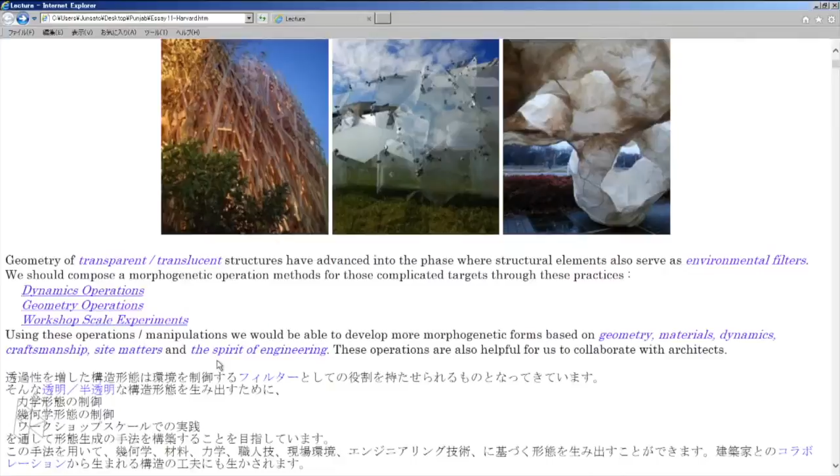We could compose the design method, like an operation story from understanding material to construction. We can have some strategy for those complicated targets. Those practices I'm trying with 3 sessions. One is dynamics operations, 2 is geometry operations, and 3 is workshop scale or experiments. Using these operations or manipulations, we can develop more morphogenetic forms based on geometry or materials or dynamics, craftsmanship, and site matters. Or we can perform the spirit of engineering.

This time, I will show you some projects, how these operations are composed. At first, dynamics operations. I'm researching glass structures. So I have tried several times already actual projects using glass structure. One is this Extreme Nature in the Venice Biennale 2008 with the architect Junya Ishigami. His idea was building greenhouses like this, 4 greenhouses around the Japan Pavilion in the park of Venice.

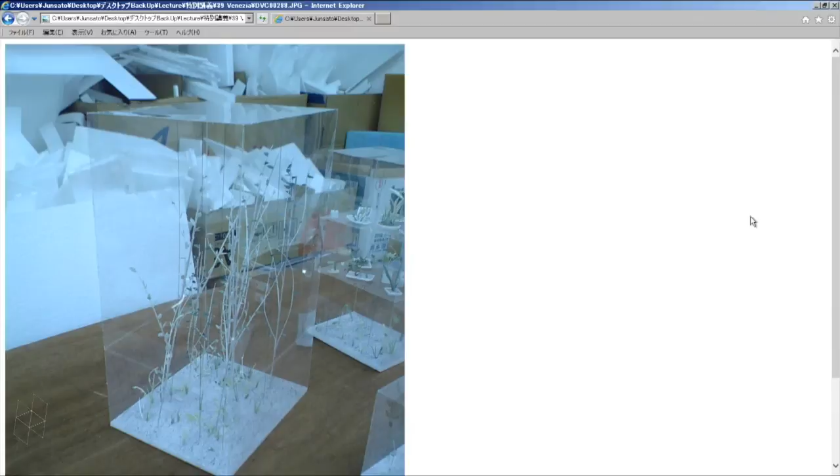And his idea was like this. This is the first model, using this transparent material. He says this should be thin glass, and this is the structure for plants. And his proposal was without using an air conditioner or something controlling humidity or like that.

Without that, only covering with glass, we can make a little different climate from exterior. So a little bit different plants can be grown in this space. And this is a space for plants. So those bothering things, air conditioners or machines like that, or also the structure, should be vanished.

He requests me, and he says, of course, this structure is possible by thick glass. To make the large box by thick glass, it is possible. But he says when the glass becomes thick, it doesn't look transparent. And his request was these columns and beams should be as thin as possible. In this model, you can see this black line. These are columns and beams.

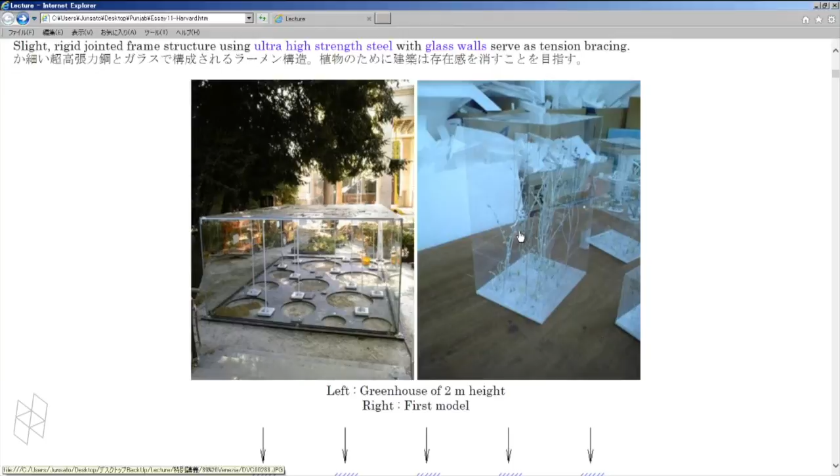His image was like this at first, and he asked me what's the strategy to make this structure feasible. But really, it is easier said than done. I asked him, is that your problem or my problem? I sometimes say to architects or other people, we are the realizer of the structure. So it was so annoying, but I have practiced as many techniques as I have.

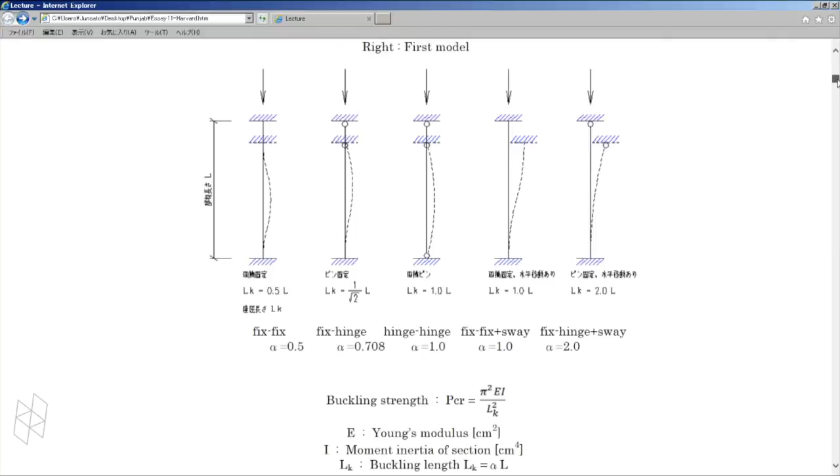And the basic idea is like this. Maybe you know buckling; controlling the buckling phenomenon is important. In the center, this is a simple, basic buckling phenomenon of the thin column, and it has this formula here. For buckling phenomena, the boundary condition is so important. Like this hinge and no sway, we can think this to be a basic one.

And if we could make it fixed and fixed and no sway, it becomes 4 times stronger than this basic one. On the other hand, fixed and hinge and sway, it becomes 4 times weaker. So the target is, of course, this one, fixed and fixed. But we cannot achieve a perfectly fixed one, so we should think how we can make it close to fixed.

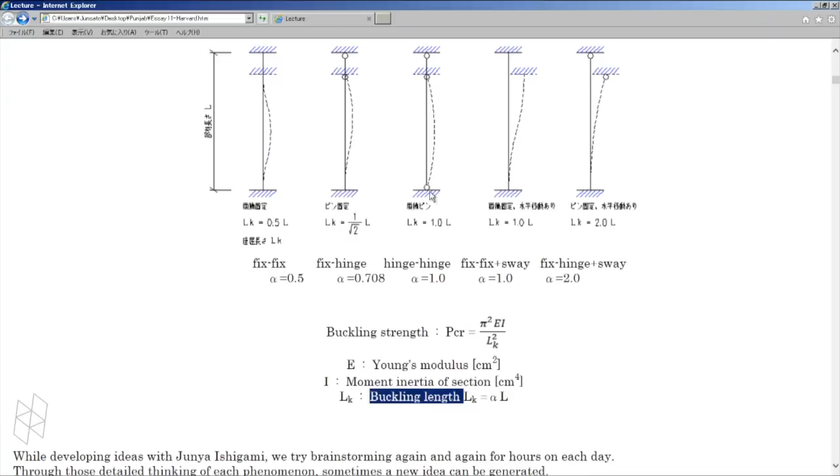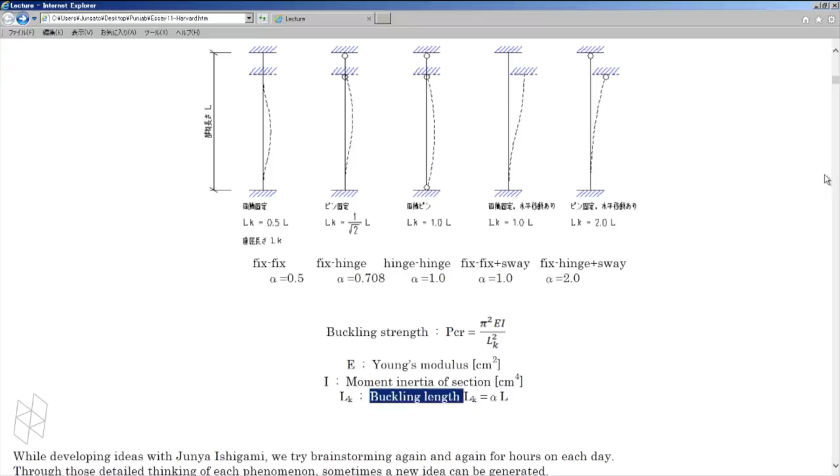And the important thing is, if it is 4 times stronger, as the buckling strength is inversely proportional to the square of length here, the buckling length can be thought of as half of this length. And like that, imagining buckling strength with buckling length is really easy.

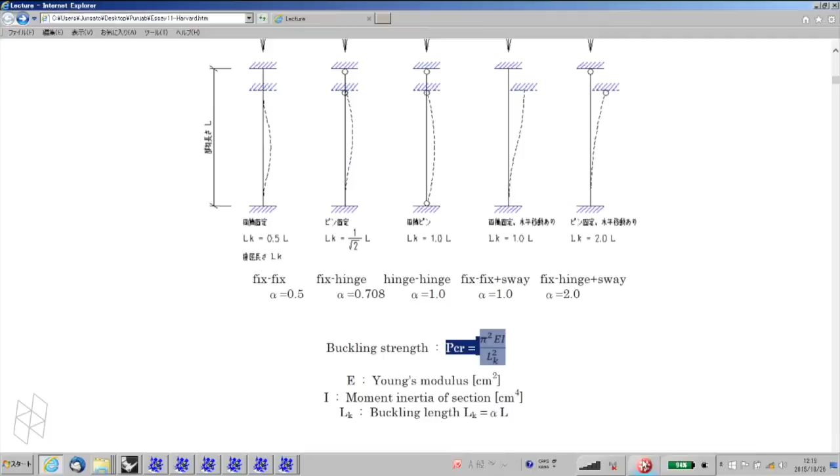With Junya Ishigami, while developing ideas, we tried brainstorming and discussion again and again for hours. Sometimes it was 5 hours each day, meeting to meeting, as long as possible. He can understand dynamics, but he doesn't know this formula. But he knows he should control the boundary condition, and we should control the buckling length. So he asks me how to shorten the buckling length, or about the boundary condition.

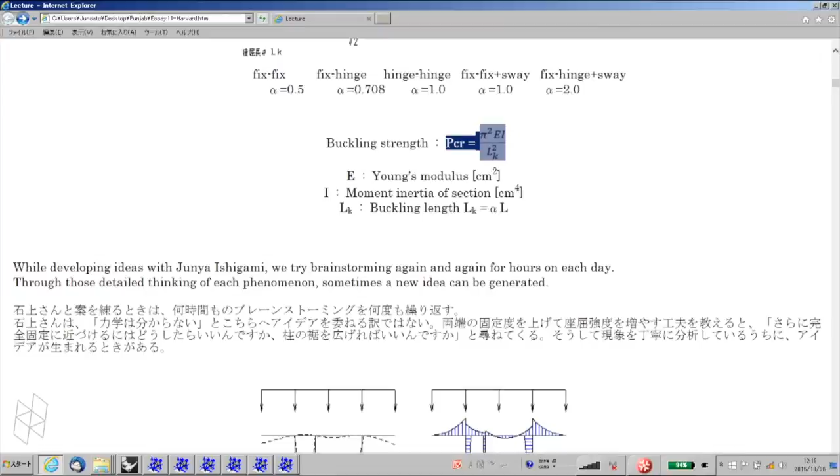How about making the base plate or joint rigid using thick plates, or how about expanding the bottom of the columns? I don't know how to do it, but how about expanding? He proposed to me. And sometimes, he tells me, it is some strange theory of physics. But through that detailed thinking about each phenomenon, sometimes a new idea can be generated. And this time, I got a new idea like this.

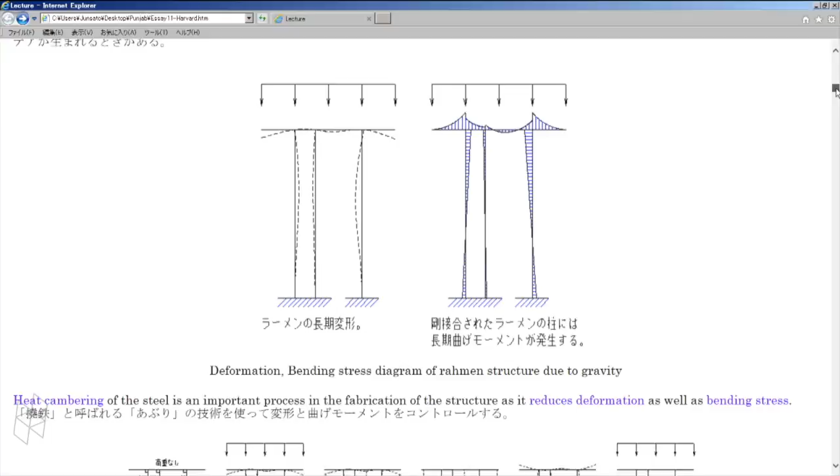Imagine the steel frame like this. With gravity, it deforms like this, and it has bending stress like this. This is the bending stress diagram. Around here it is big, and for the column, a little bending stress is generated. So my idea was reducing this deformation and at the same time reducing this bending stress in the column. The strategy is like this.

At first, the strategy is using heat cambering of steel. Steel craftsmen have really excellent techniques, like heating the steel. I don't know if you know or not: when steel is heated, with a burner or welded, it shrinks. That's the character of steel. And if we could use it effectively, we can do like this. At first, without thinking, build the columns and beams straight.

After that, because the glass plates are so heavy, imagine when the glass is loaded, it will deform like this. To reproduce this deformation, we should realize the same deformation with these weights. These are very heavy weights, and I could realize this deformation. After that, the steel craftsmen make the camber with heat. With a gas burner, they heat the steel and shrink it like this.

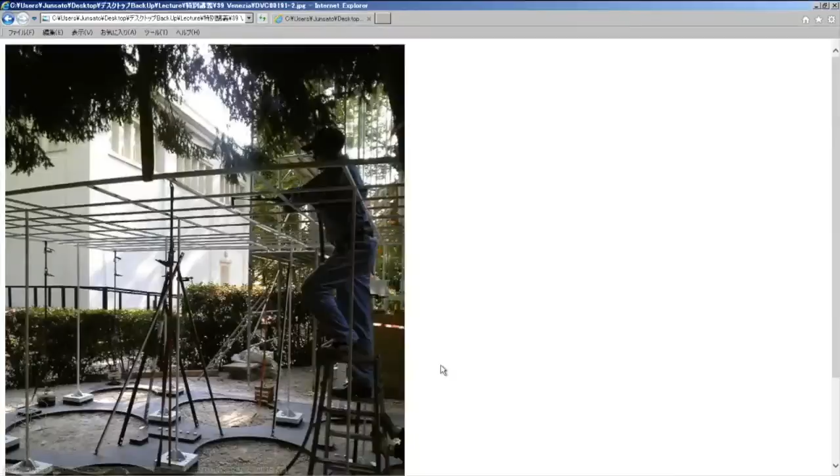This guy is heating here, like dot and dot and dot. He heats, and the beam shrinks and comes up. And finally, if the beams are reformed to flat, these weights should be released. When it is released, the beams come up. But after that, when the glass is loaded, the beam comes down again.

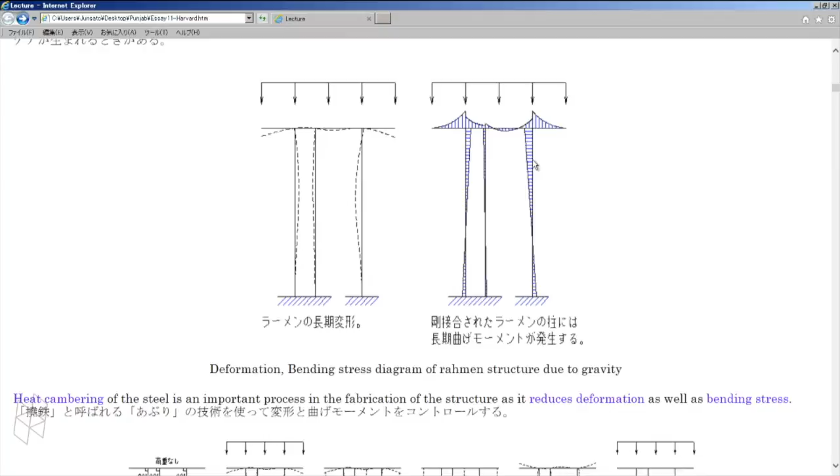They're flat. And in this process, the column is not heated, and so these columns come straight, vertical and straight. That means the column doesn't have curvature, and so the bending moment, bending stress, is not generated. This is a little complicated process, but like this, we could achieve the thin column. We could reduce the bending stress, and we could make the column thinner.

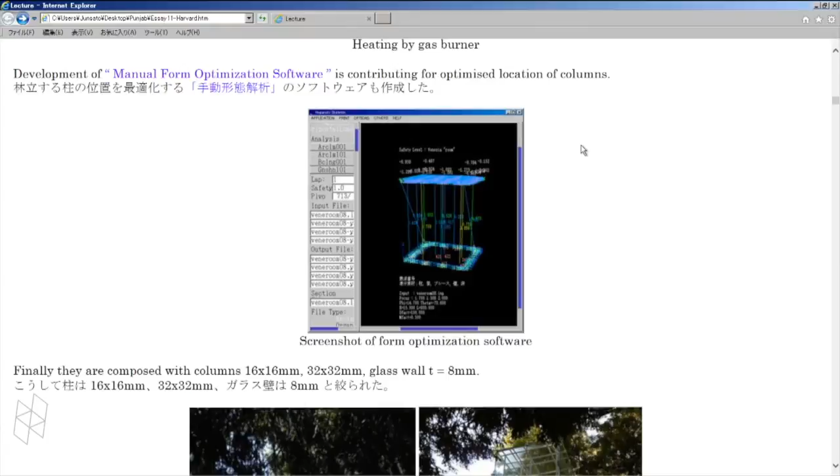And also, I have developed the optimization software for this project. It has randomly located columns, and I have provided the manual form of the optimization software. I will show you later. And using this, I optimized the location of columns to manipulate the distribution of load. And finally, we could make the lower greenhouse. It is 2 meters high with 16 millimeter columns, like this size. And for about 6 meters high, we could make it 32 millimeters, like this size of columns and beams.

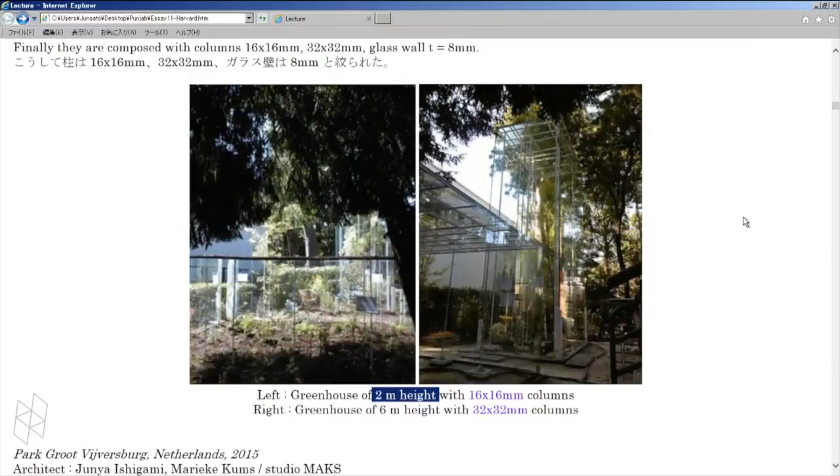And finally, I think we could realize the transparent structure, and like this, plants are located, and maybe Junya Ishigami is satisfied with this. Maybe.

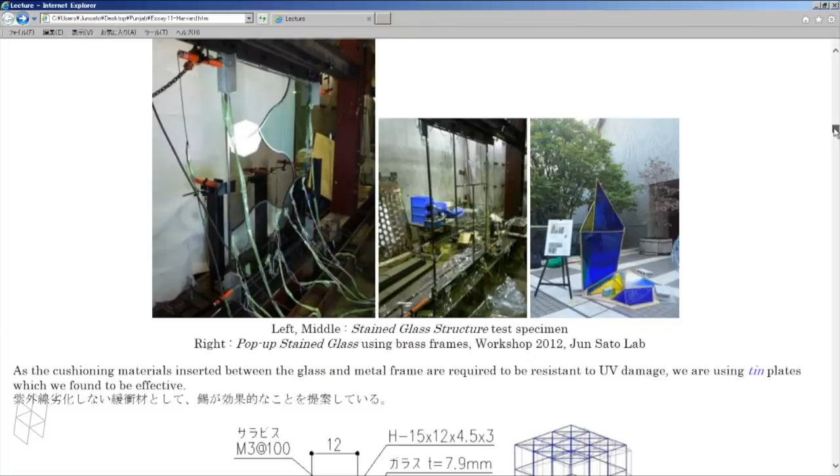And my research about glass structure is like this. One of the things I'm researching now is this. I'm calling it stained glass structure, with this thin frame, and the glass plates are fixed to these frames and work not only as the quake-proof wall but also vertically for gravity. It should work. And because these thin frames are critical for the buckling phenomenon, we should control the buckling phenomenon and the plastic state of the material.

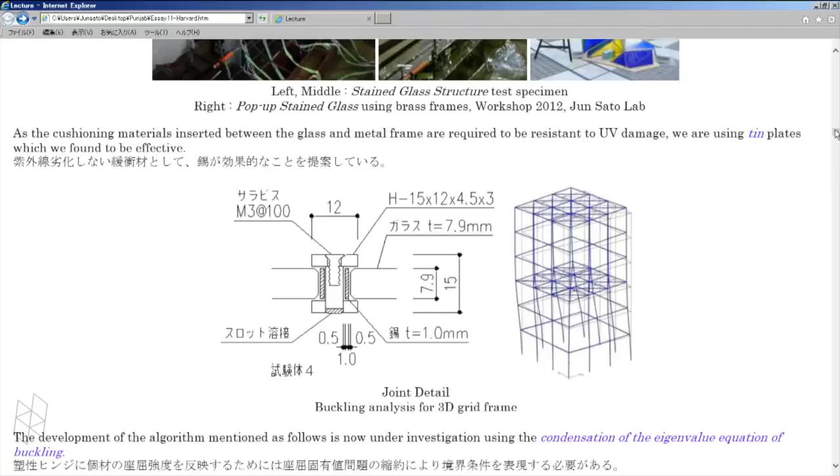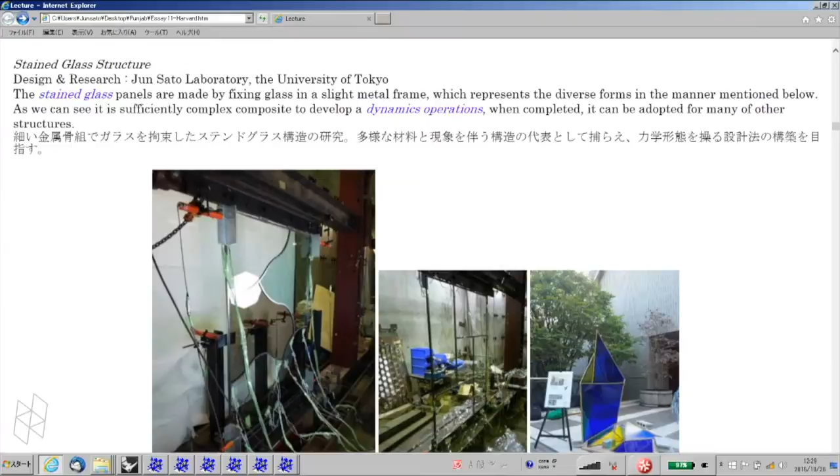And you know, materials have elastic and plastic states. Plastic behavior is sometimes called ductile, the ability to deform. In Japan, we have big earthquakes, so we expect the material to absorb energy in a plastic state, with plastic behavior. And finally, this structure is composed of really diverse elements, and it has diverse phenomena, composed of multiple materials, with bar elements and plate elements, and an optimized framework like this pattern can be optimized to make it stronger.

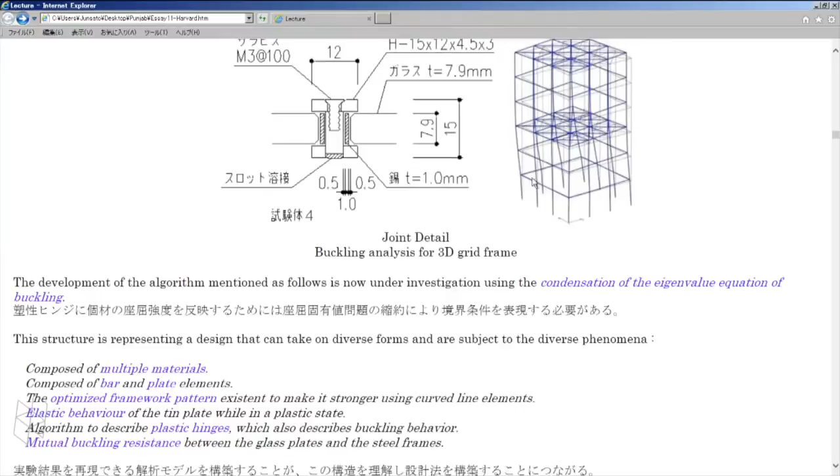And we have here the cushioning material, and I'm proposing that tin, a kind of metal, is useful. The tin works as an elastic material. It is a little complicated, but it works like that. And also the mutual buckling resistance between these frames and glass will work, and we should find that effect. And also the plastic behavior should be considered with buckling behavior.

If the column is thick, buckling behavior is not so critical, so we can focus on the plastic behavior. But when it becomes thin like this, both plastic and buckling behavior interact with each other. So that is important.

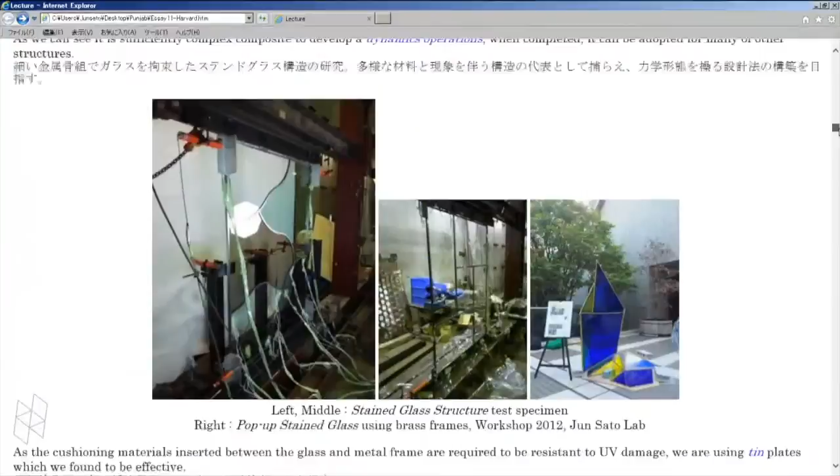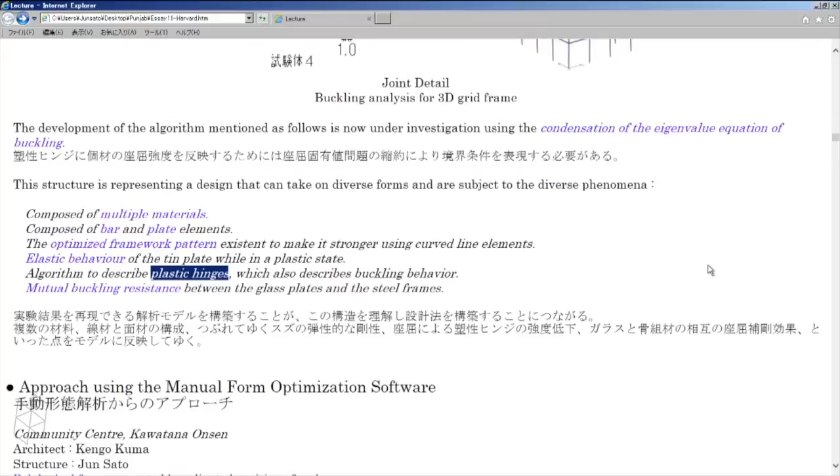With this complex structure with diverse elements, I'm thinking this structure represents other kinds of complex structures. So if we could have a strategy for how to analyze or how to realize these structures, it will be helpful for other structures.

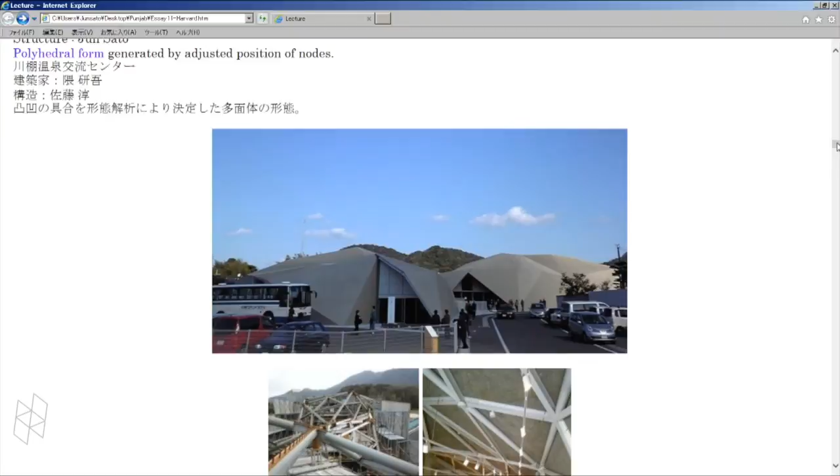And I showed you one of the optimization software, and from here, using the optimization software, which shapes can be realized. This is the community center in Kawatana Onsen in Japan with Kengo Kuma. It has this polyhedral form, generated by adjusting the nodes. I will show you later. It has this shape, and the structure is like this. It has steel frames like this, and it is covered by a concrete surface. For this project, I provided this software. It is like this.

Just a moment. Oh, this is the simple model, for the sample. Once it is calculated, it has red elements like this. This diagram is showing that blue has enough strength, and then comes green, yellow, orange. It still can; the safety ratio is reducing, but orange is still possible. And if we have red lines, red means impossible, or it is too weak.

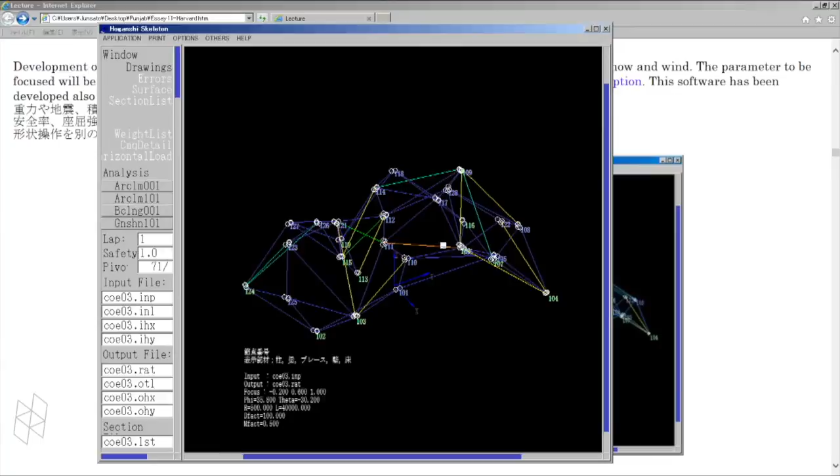And for this software, I programmed it so that using the mouse you can transform the shape like this, and what you have to do is find the shape without red elements. Oh, now red has vanished, and so this shape is possible to build. And around here, there are a lot of blue elements. So maybe this can be inflated like this, but like this, it is impossible, of course. And so, like this, you can find manually which shape is possible and which is impossible. And using this software, it is applicable for many other shapes.

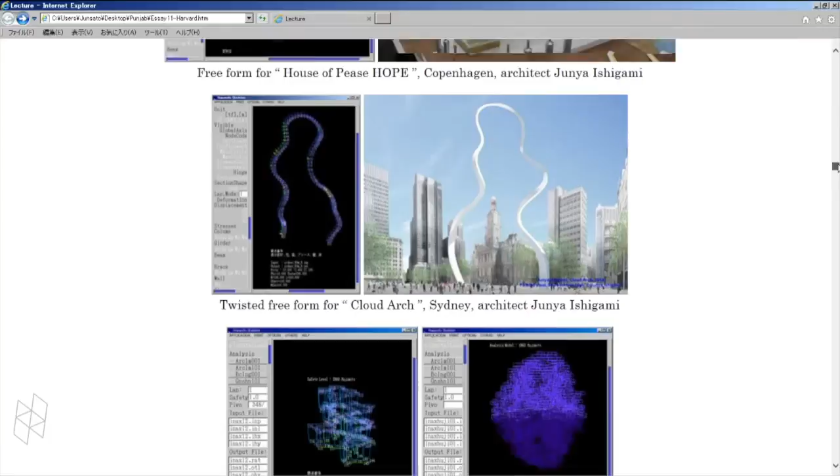Here's a sample for the freeform. This is another project. This is a little secret. Don't tell anybody. This is for the Venice Biennale next year, but I won't tell the details.

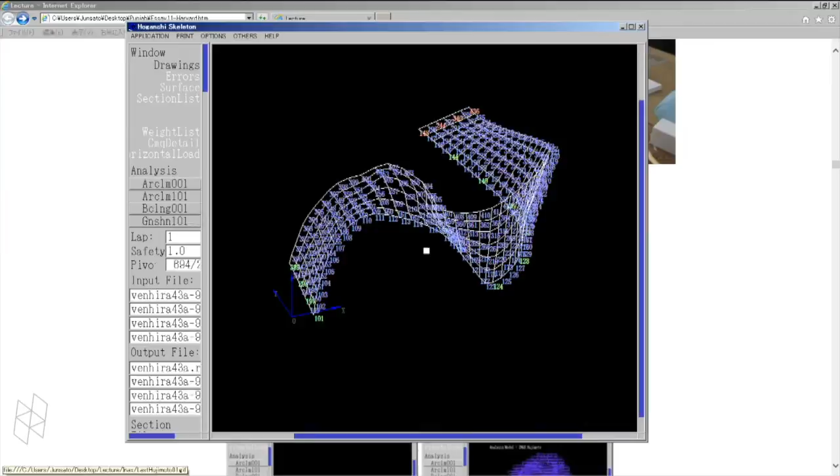All right. This software is performing this calculation here, and you can see the red elements around here. And for this project, I have provided this transforming program. When I pick one point, the area around there will be smoothly transformed, and so you can find which freeform is strong. Using this, it is a little difficult, you can see. Freeform is a little difficult, but you can find it. Maybe it takes time, but you can find it. Oh, around here, the red has vanished, but around here, it is still red. And so, like this, you can find it using this software.

And also I have programmed, not for this project, but this is possible. This is the adding column operation. You can add the columns one by one, like this, and you can find how the columns should be located. It becomes blue. Just a moment. Maybe this will be better.

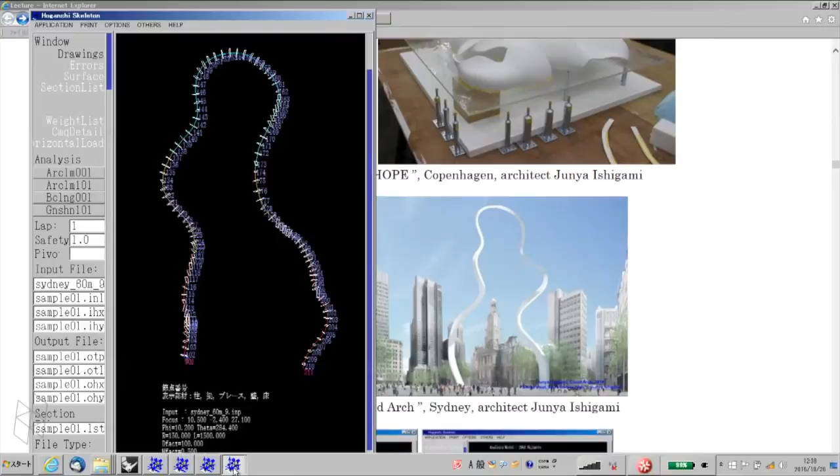For this Cloud Arch project, I have programmed this software. It has this shape, and of course, it is possible to move it like this and smoothly transform the whole shape. And every time, red to blue is displayed like this. I also programmed a close-up around here, and you can see the sections. It has a rectangular section, and looks like a ribbon.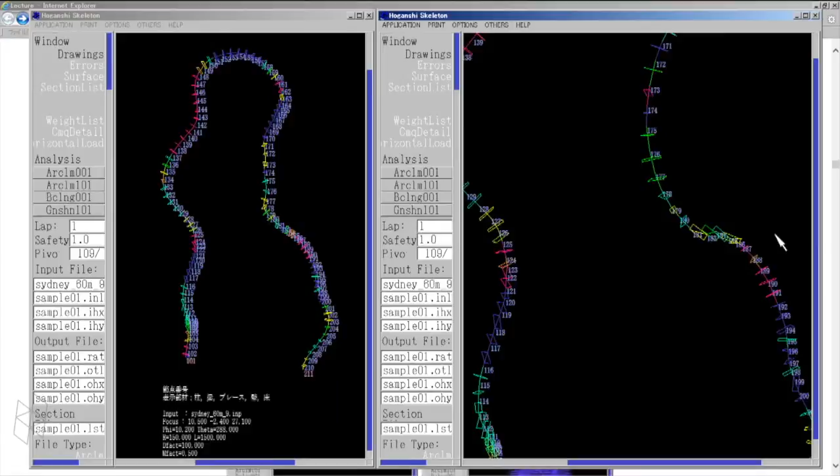And I have programmed it like this. You can see the section is twisted. When I move it like this, every time the color is also changing. Around here it is also twisted smoothly, and finally, we should find how it should be twisted, and the target will be like this image, a twisted and waving tower.

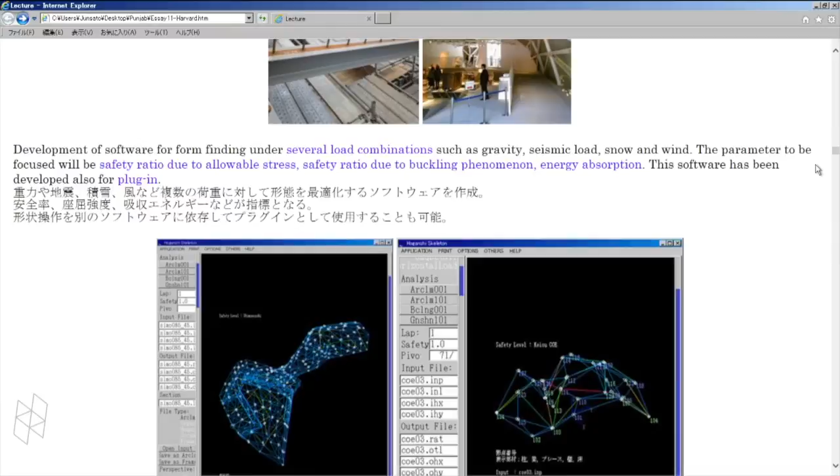The character of my algorithm is that in many cases optimization is performed against gravity, but my algorithm is applicable to several load combinations and load cases at the same time, such as gravity, seismic load, snow or wind, and they can be combined. So after transforming, in just 1 or 2 seconds, the color is displayed. But in those 1 or 2 seconds, many calculations are performed: gravity calculation, X direction earthquake calculation, and Y direction. And finally, the strength checking program for each element is performed, and the colors are displayed. So many calculations are performed in just several seconds.

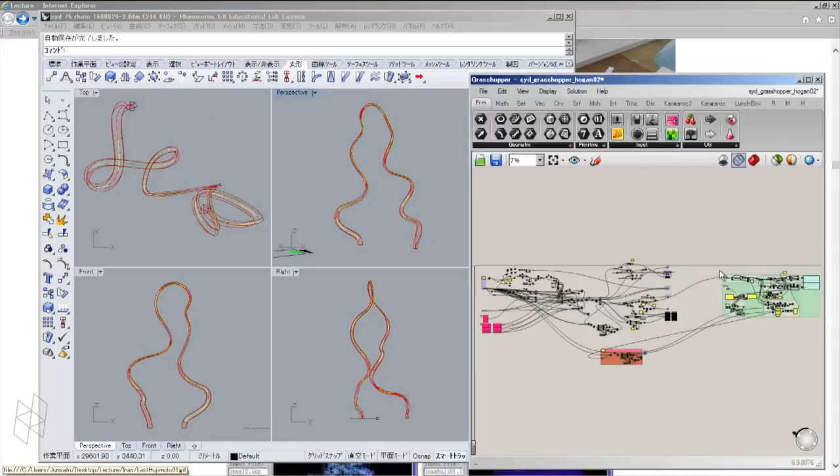And this software is also applicable as plugins. If you're good at transforming in Rhino, you can compose this software. I'm not so good at using Rhino, but my staff has composed these components. Here it has the whole shape, and when you push this button, my software is automatically executed, and the color is indicated like this. This is almost half automatic, and maybe if you want more interactive software, it can be developed into real-time displaying software.

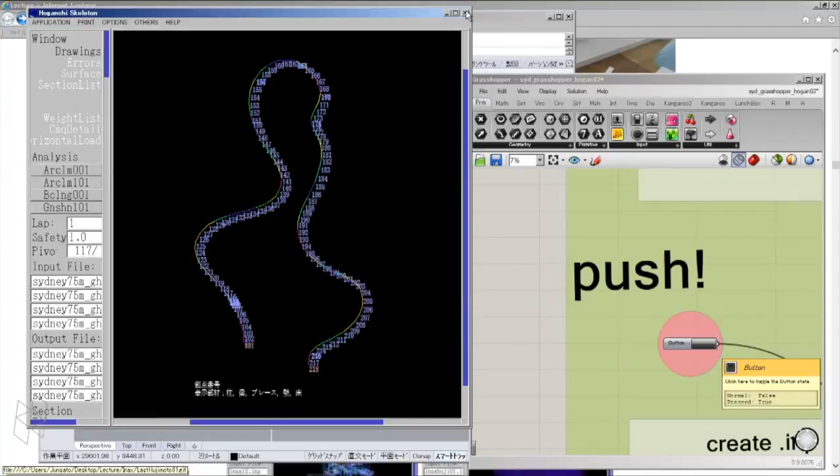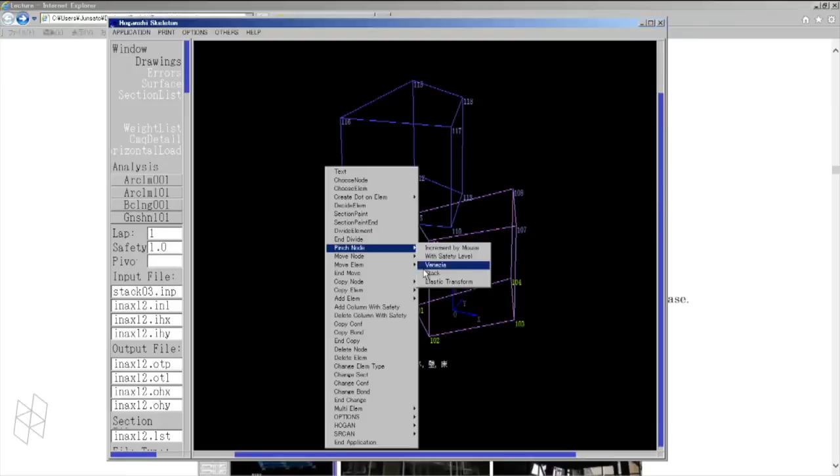And this shape is also adaptable for this stacking system, like this. This software, this algorithm is like this here. When the two volumes are stacked, the calculation is done, and here are the red lines. And if you move one node, this volume will come like this. Oh yeah. And you can see if it is arranged like this, it is easy to build.

But of course, the cantilever is so hard. You can know by this software. For these two elements, it is easy to know without using this software. But it becomes a little hard for my human brain to know if it comes like this.

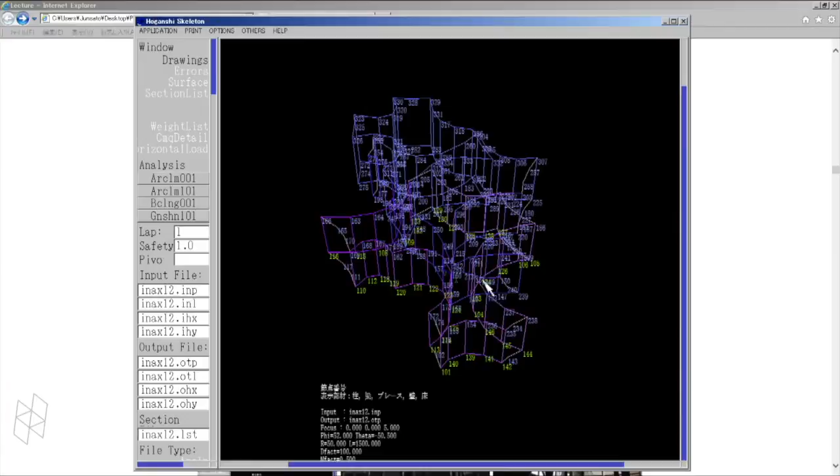This is Sou Fujimoto's proposal of curved walls or free-formed spaces stacked like this. It is a little hard to know how we should operate these frames. When I move one point, it is sliding, but yeah, I'm not sure how now. But this is adaptable for this structure, this shape.

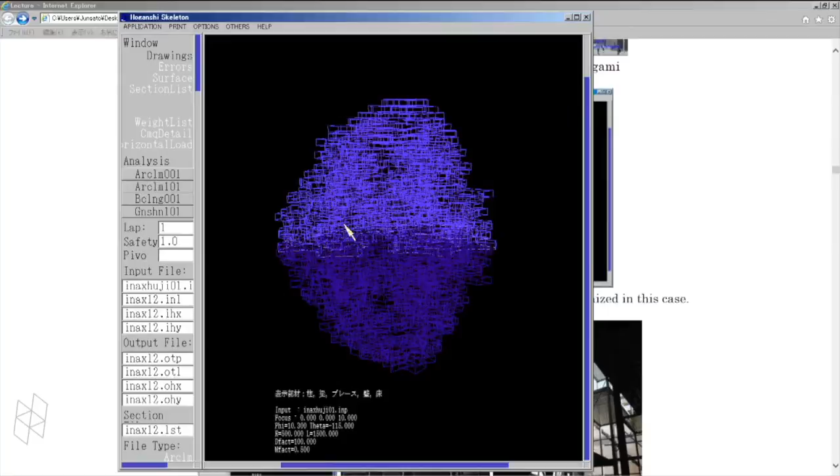And finally, Sou Fujimoto proposed this building. It is 100 meters high, the free-formed volumes are stacked like this, and it has a large porous space in the center. This is not our real project, but his idea was that inside this architecture, we can feel like we are under a big tree and sunlight comes in.

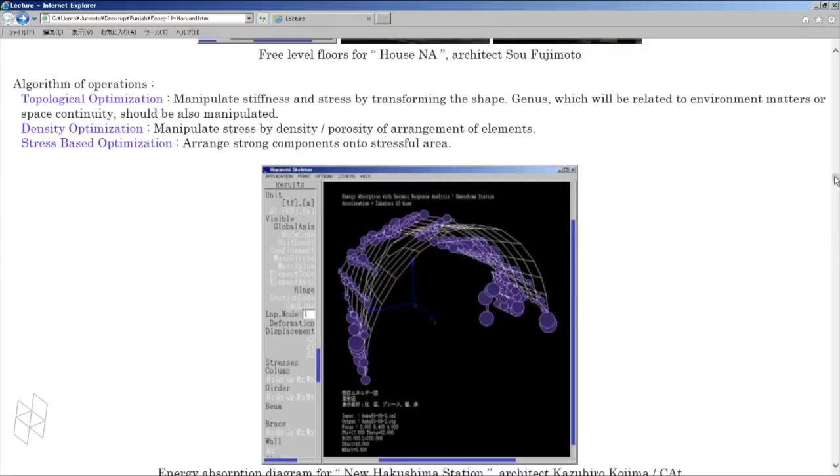And also House NA with Sou Fujimoto. I have tried the optimization like this, with free level floors. The parameter of the optimization, as I showed you, is the safety ratio for stress by gravity or earthquake, and it has a possibility to use energy absorption of seismic vibrations. This is not yet developed, but I'm trying to develop this software.

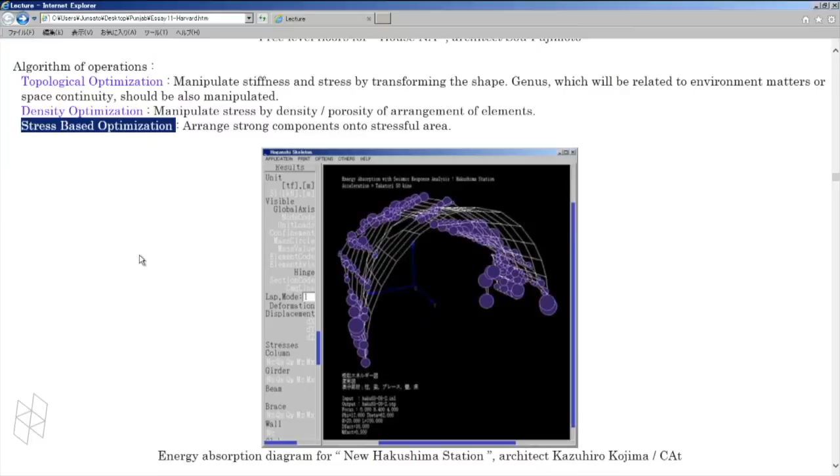What you have to think about is how to transform the shapes to optimize the structure. There are some ideas like topological optimization, density optimization, or stress-based optimization. Stress-based optimization is easy to understand: arrange strong components onto stressful areas. It means arranging strong, thick columns in stressful areas. Density optimization is also easy to know. If you find some area really stressful, you can put many elements there to increase the density.

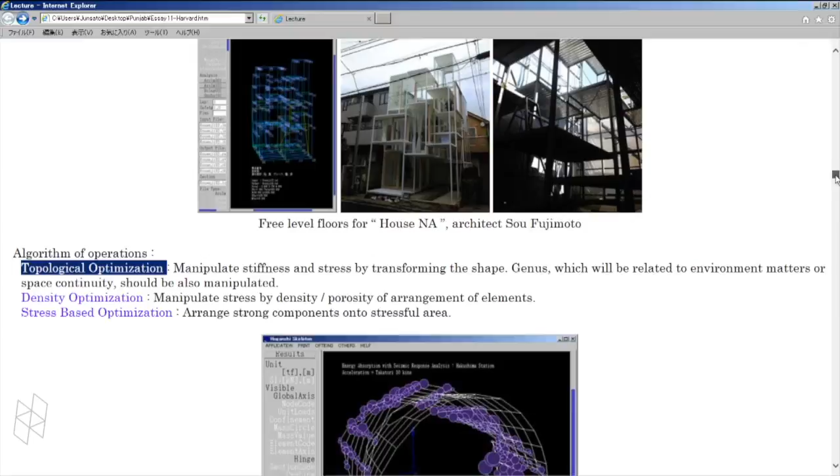And there is topological optimization. I think this word is not so exact in the mathematical meaning, but it is easy to imagine. It means manipulating the stiffness or stress by transforming the shape. The freeform or polyhedral shapes I showed you, or controlling the floors, are maybe topological optimization.

There's a word, genus, in topology. It means the number of holes of the surface or object. This idea is not so related to structure. Rather, it is related to environmental matters or space continuity. So it should be manipulated at the same time with structure and environment.

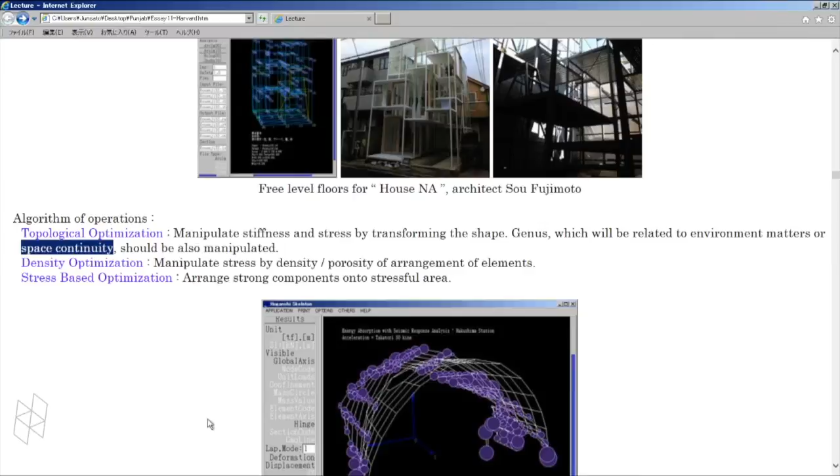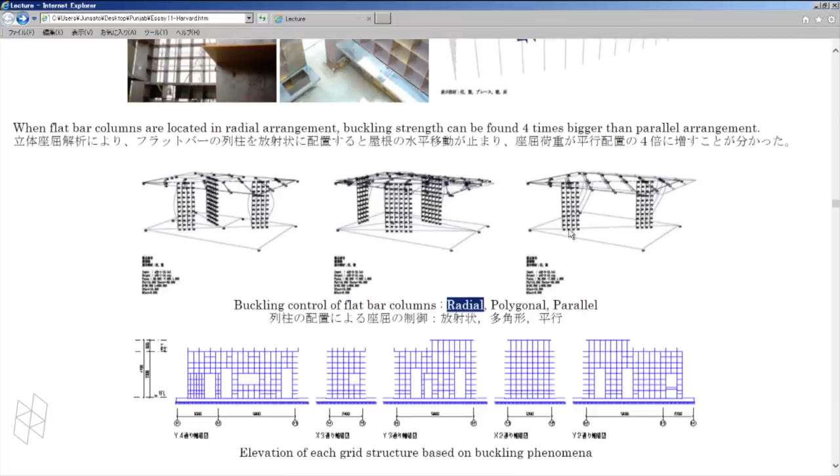And from here, you can see steel fabrication is so important. I'll make it short. I'm trying steel mesh structures, or this one using thin plates. It is only 6 millimeters, without a backboard for the shelves. This structure is possible by controlling the buckling phenomenon. If the thin plates are located in a radial way, it becomes 4 times stronger than a parallel arrangement. And finally, I could achieve this structure with only 6 millimeter steel plates.

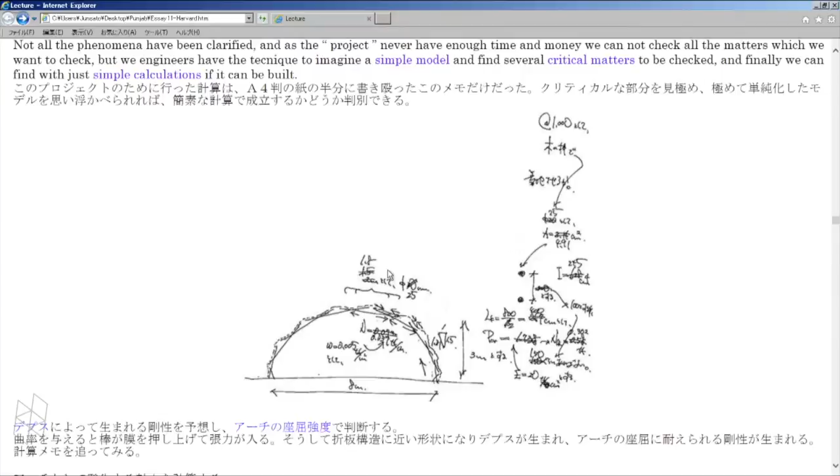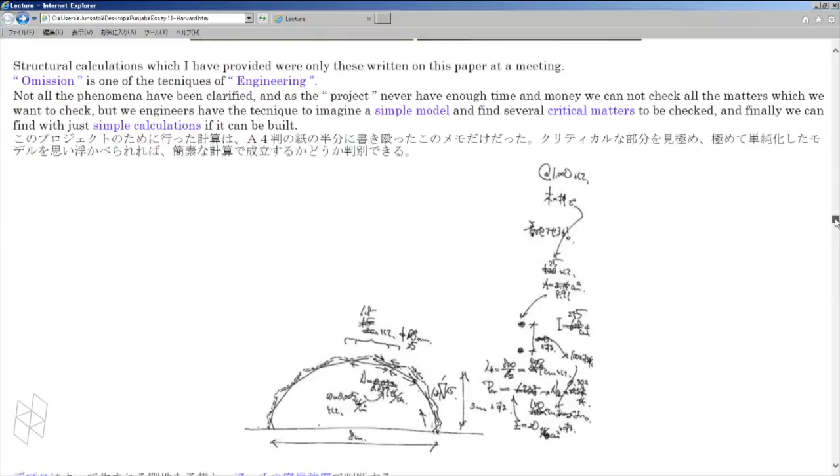And for this structure, what I calculated is only these. I didn't use a computer or software. We have techniques to simplify the structure. I think omission is one of the techniques of engineering. And finally, we can calculate with only these calculations. It is not written in English, I'm sorry, but the detail is like this. With less than 10 calculations, it can be checked whether it is stable or not.

And from here, the geometry operations, what I call all the geometry operations, is like this. This is Sunny Hills in Aoyama in Tokyo with Kengo Kuma.

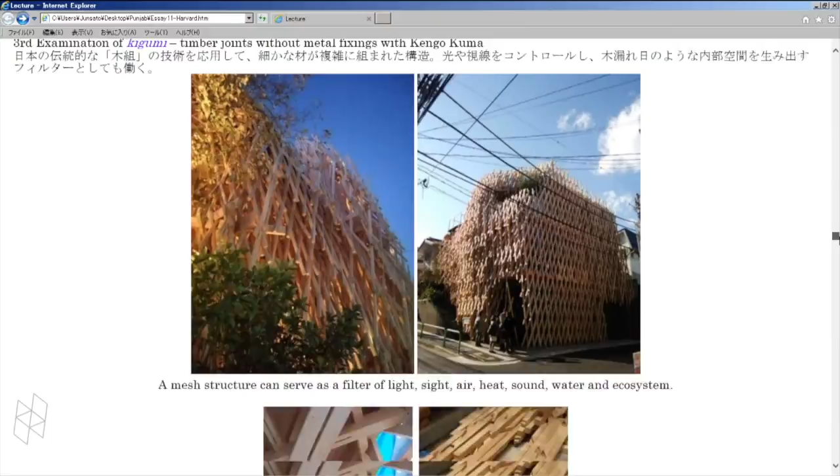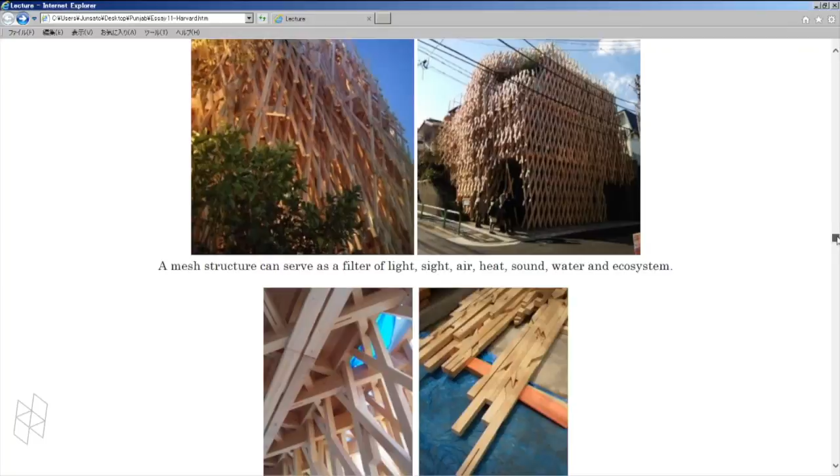I have tried the 3-dimensional or complicated Kigumi structure. Kigumi is a Japanese word, a traditional timber joint system. I have developed from that traditional system this really complicated shape. But I thought this looks very much like a filter for something like light, sight, air, heat, sound, or maybe for an ecosystem. So with this meshed structure, we can control that environment.

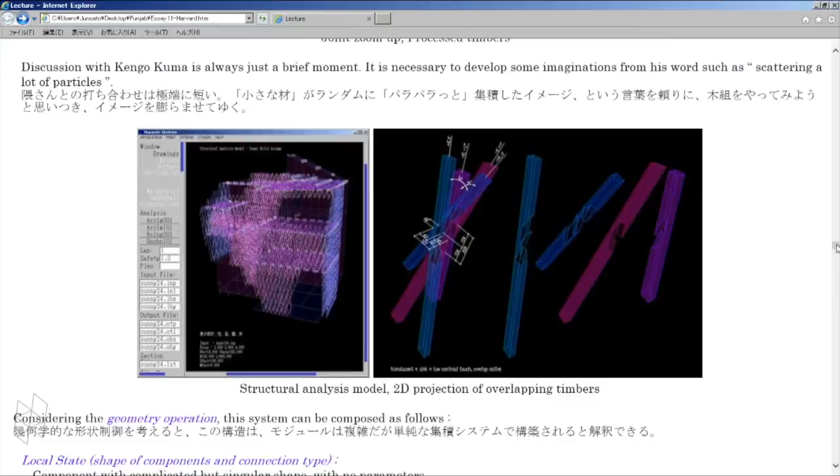It is so complicated, like this. It is carved by carpenters. You can see this photo, it is carved in many different angles, but finally they could get it done, and it could be constructed.

This system looks like a really complicated shape, but it is understood as a simple system. The one component is so complicated, but the growth process is so easy, like stacking boxels. Just stacking one by one, we can make the whole shape like this.

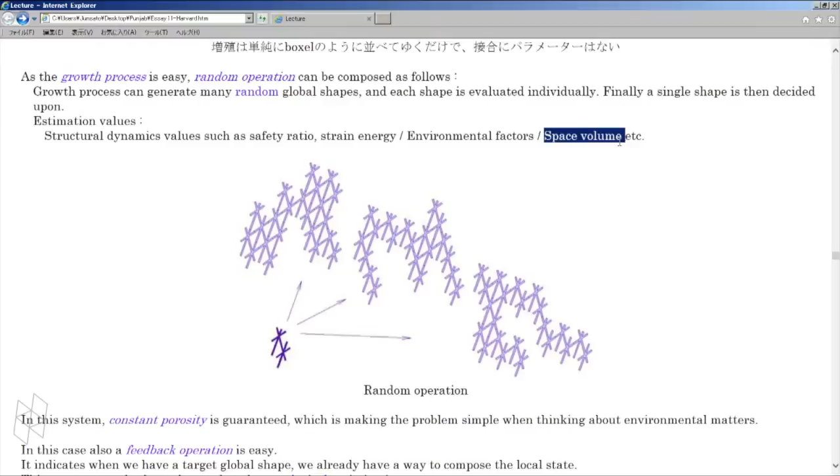Because of the easiness of that growth, we can make random shapes like this, and each one should be evaluated by parameters like safety ratio, strain energy, or other structural and environmental factors like space volume, whether it is wide or not.

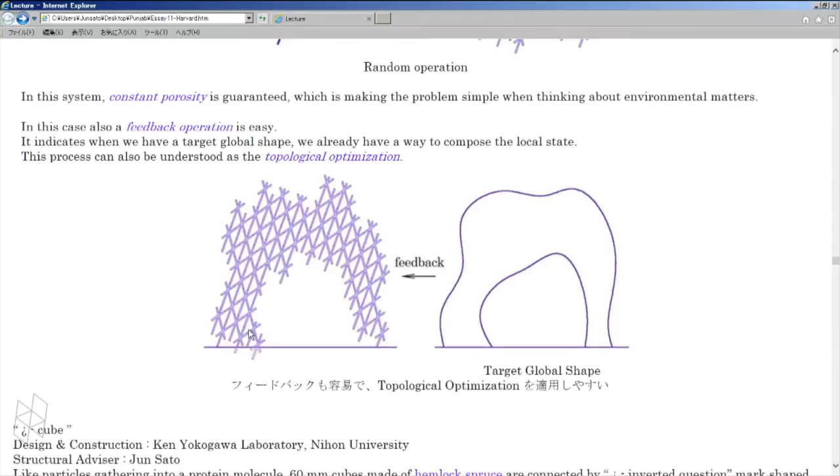Because the growth process is easy, the feedback is also easy. When we have the target shape, we can easily know how we should arrange these components. But sometimes this feedback system is not so easy to have.

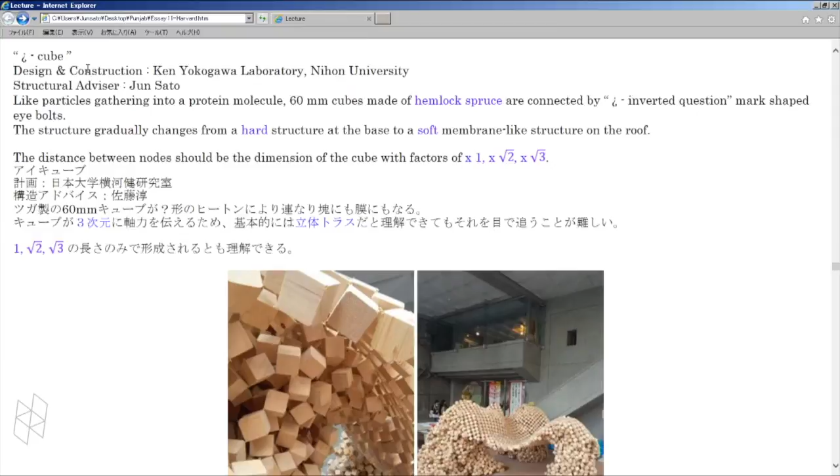How to say... I heard this is called ICube - somebody know? All right, it is called ICube. This is just a temporary pavilion with Nihon University students. Like this, cubes are jointed - around 4,000 cubes jointed at their nodes.

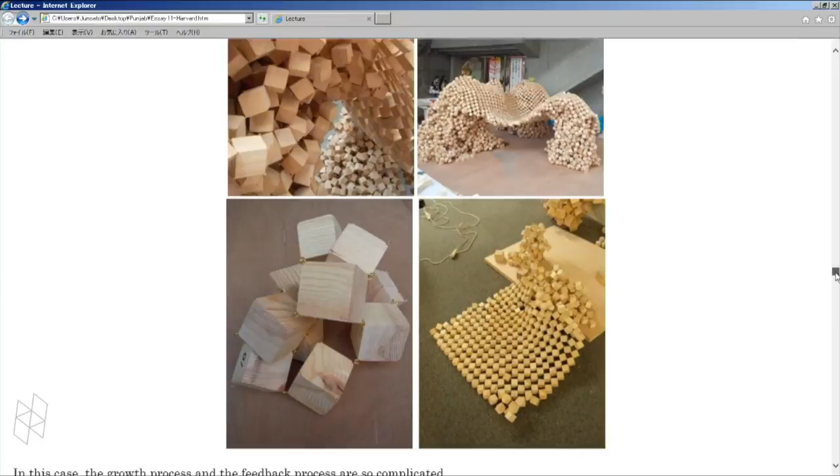In this system, what is difficult is that when it is connected from node to node, if we think of this edge as 1, this distance should be 1, √2, or √3. We can only have 3 patterns. So when we think about how to add one element to this structure, it is so hard, because in most cases this distance is not one of those 3 patterns.

So this operation is so difficult once it is imagined. But in the construction, we could feel it was not so hard to add a cube. I thought it was because it has this system.

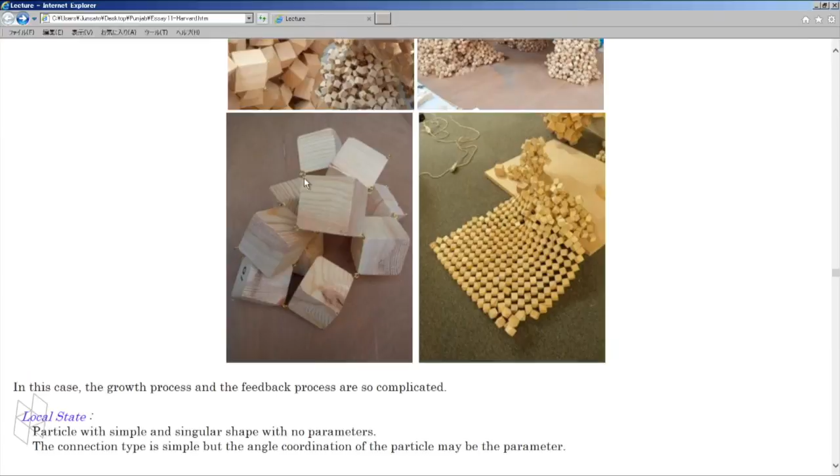At the joint, we could have something a little loose, some flexibility around here. It is jointed by a question mark joint, so it has a little flexibility, and I thought of it as a fuzzy node. The fuzzy node system makes it much easier to compose the whole shape.

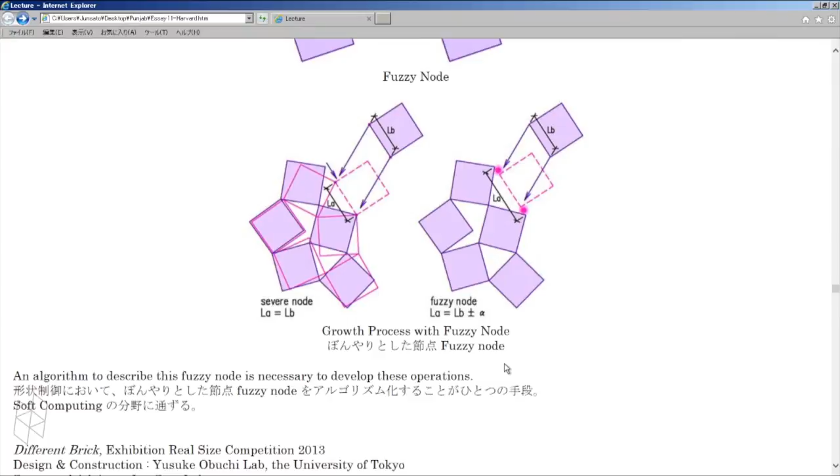It is considered like this: this distance is called LB, and here to here is LA, but we can have a little clearance or fuzzy area like this.

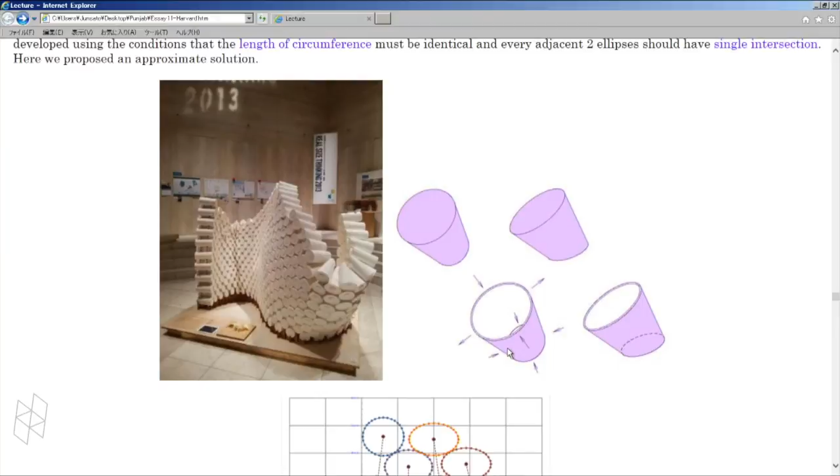So it becomes much easier to compose. Another system which is difficult to find the feedback for is called different bricks. It has this cone shape and is molded like this. Using this thin foam, if we press it, we can make the ellipse-shaped bricks, and when it is stacked like this, we can compose an almost free curve.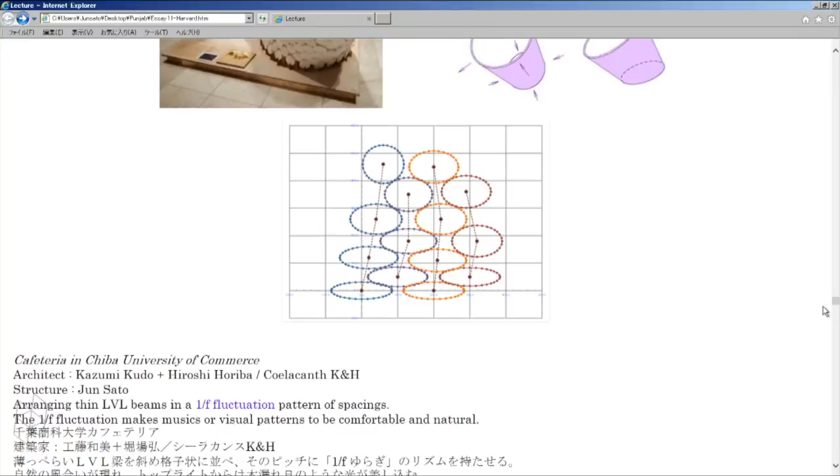But the ellipse packing problem is so complicated and difficult to solve. We found we should solve simultaneous quartic equations, and that was not easy to solve. So I proposed how to make an approximate solution, and finally we could find this approximate calculation. It is approximate because you can see a little spacing or a little bit of overlap around here, but almost it is solved.

So finally, it could be solved, and we could have the feedback system. But if we could not solve it, we cannot have that feedback system. So considering this story, we can know clearly what we should solve.

And here, another idea of using geometry for structure: this is the cafeteria in Chiba University of Commerce. I tried this roof with beams in a diagonal or grid system, and we tried this pattern to have the 1/f fluctuation pattern.

Basically, 1/f fluctuation is for waves, like music, voice, or light. It is said that 1/f fluctuation makes music or visual patterns like the pattern of wood - you can see the lines when you cut wood, that pattern has this character. It is said 1/f fluctuation makes us feel comfortable or natural.

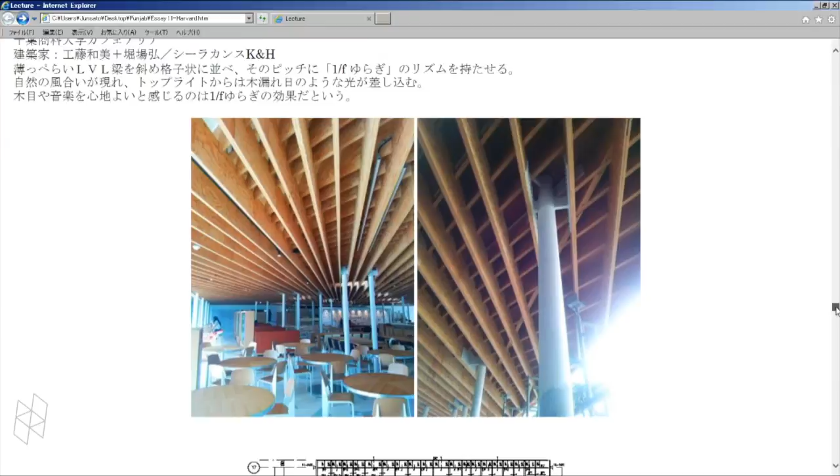So we tried this pattern for this roof, and finally, for this pattern, I optimized the columns. Columns are located like this, and I have optimized them, and finally it could have relation with the structure.

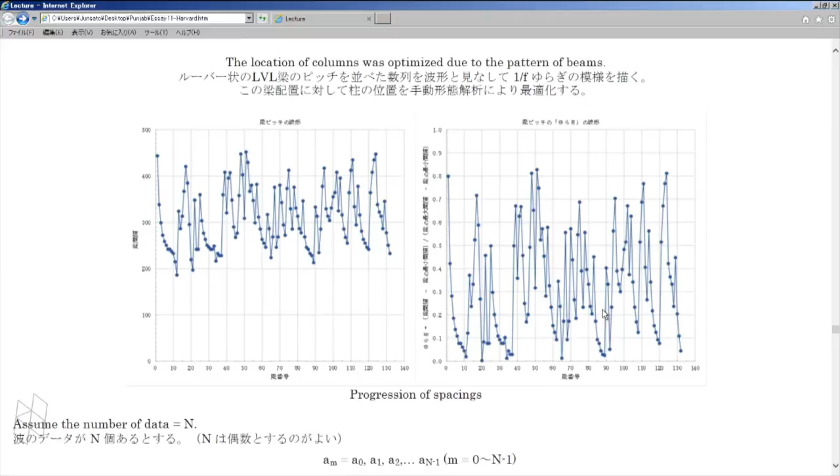I think you should try to find the 1/f fluctuation, or this spectrum analysis is very useful for you. It is a very simple calculation - at first, you should think about the spacings of beams or similar values.

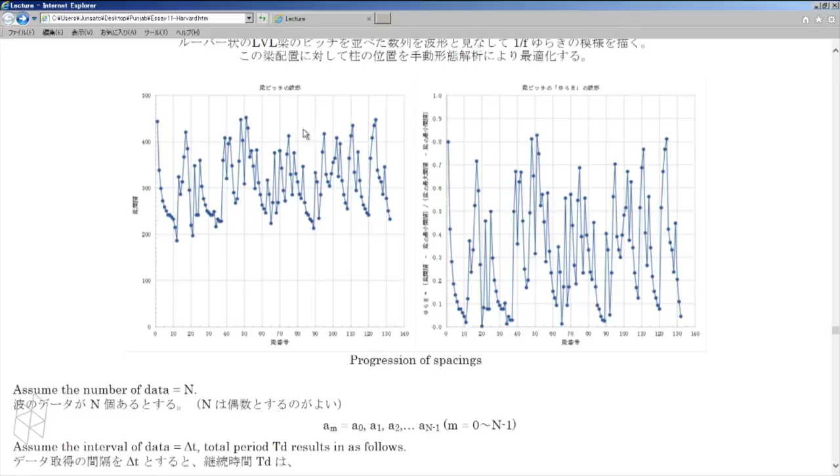It will be considered as a progression of spacing, like this, and it is considered as a wave. You should extract this area, it is called fluctuation. And after that, when you have n numbers of values, it is considered as a wave.

Finally, you can calculate it with only these three formulae, and you can have a spectrum like this.

When we draw the spectrum in a logarithm scale, it is found to have almost a gradient of -1. In logarithm scale, with a -1 gradient, since the horizontal axis is frequency of wave, f is frequency of wave, the -1 means 1/f.

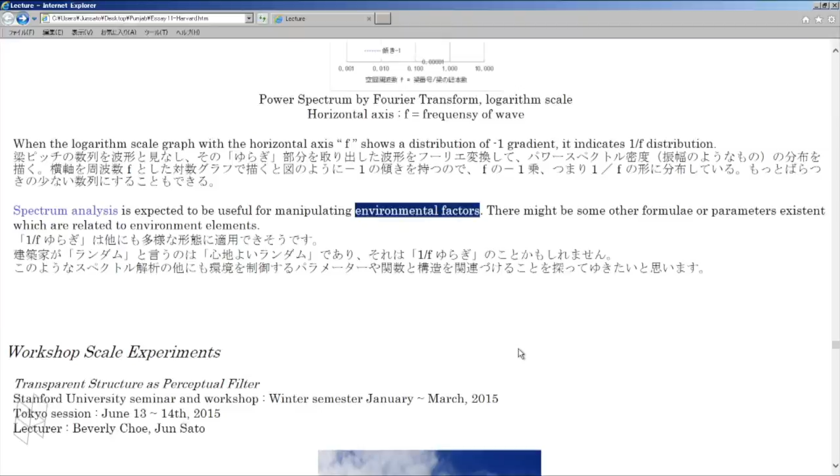So it is called 1/f noise. This analysis is very useful for environmental factors or some design, like color charts or similar things. So I think you can try to analyze your design.

All right, in very brief, let me tell you how the workshop experiments are.

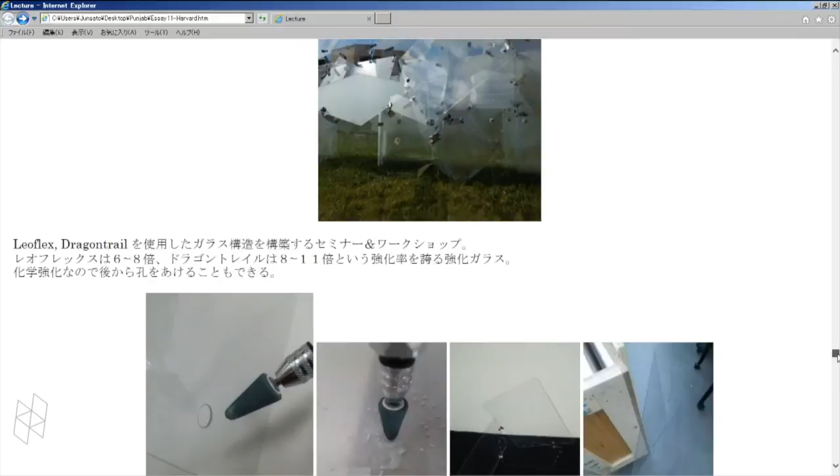This was done at Stanford University using thin glass. It really looks like a filter-like structure already, and it has only 1.3 millimeters thickness. Leoflex and Dragontrail is one of the strongest glasses, I think similar to Gorilla Glass.

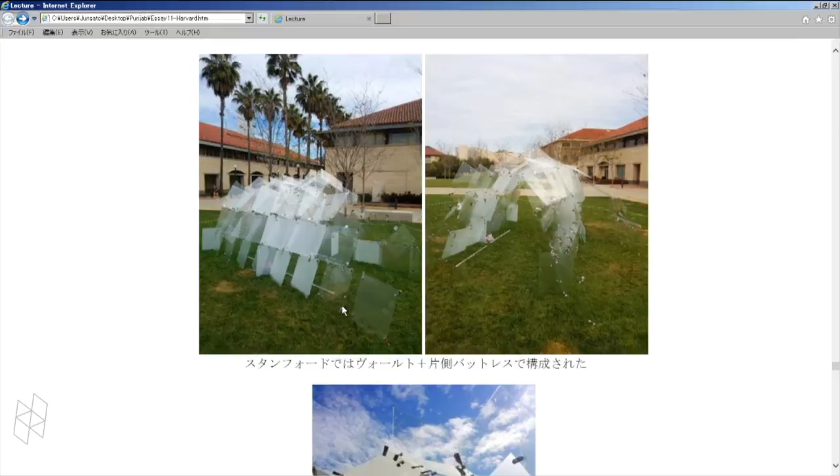Students had to think about how to control the buckling length. It has almost 2 feet by 2 feet square, but they had to control the buckling length to almost 1.5 feet. So they had to find ideas how to control or stiffen it by arrangement, and finally it was found that random arrangement makes the buckling length shorter.

This was performed also in Tokyo, and it was found that random arrangement has possibility. Also this time we could find the fuzzy node system.

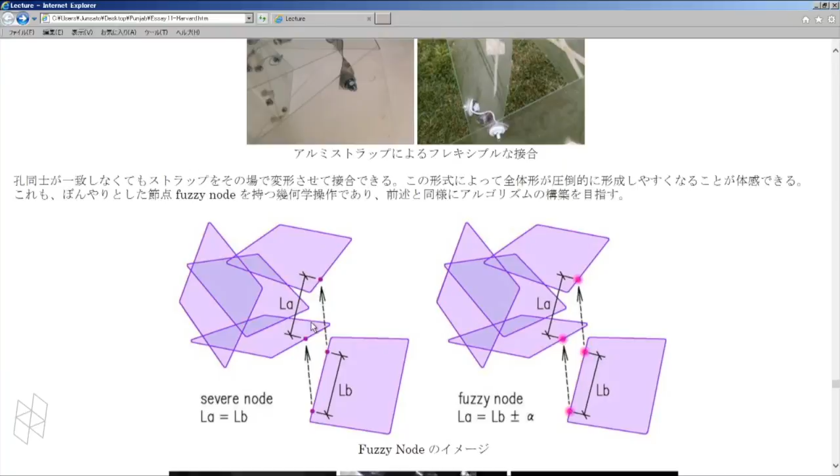The holes were previously located, so hole to hole should be adapted or jointed, but we had a flexible joint instead. It is bended or twisted at the site, and finally we found this fuzzy node system, so we could find the whole shape is not so difficult to compose.

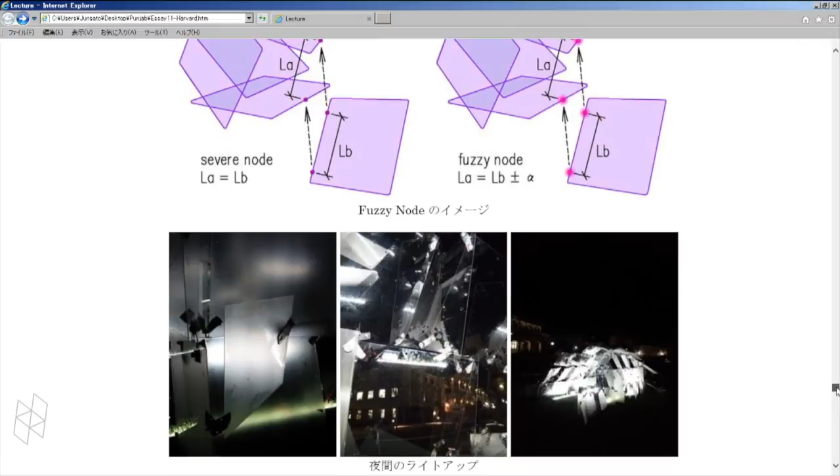Looking at here, more than 3, 4, or sometimes 5 holes are jointed. It is very difficult to understand the exact geometry. Those 4 or 5 points can be located at the same location, but it was possible by fuzzy node.

And finally, we could build like this. Other materials I'm trying include this copper shell, and using aluminum floating in the air by helium gas.

And carbon fiber reinforced plastic columns. You can see the thin column, this white line, and maybe some of you know it has collapsed. It was crushed by a cat. It was an accident. Accidentally it happened, I don't want to think about it.

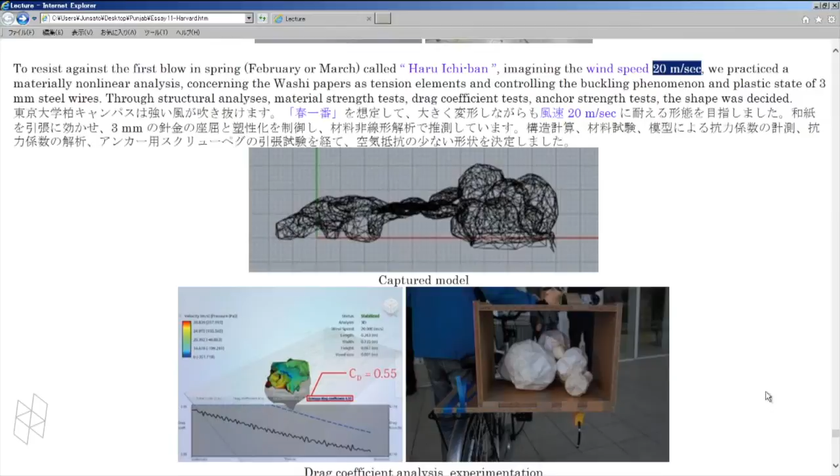So we captured the model and tried drag coefficient analysis and experimentation. This is a simple experiment: the students put the model onto a bicycle and rushed with it, again and again. I told him, faster, faster.

Finally, we found that a cloud-like freeform is good for drag coefficient, and also spheres. A single sphere is not good for drag coefficient, but if some spheres are combined, the drag coefficient comes out lower. We also did other experiments for materials and anchor plucking tests.

Finally, we could practice this materially nonlinear analysis, and this is for 20 meters per second wind, and it deforms so much, more than 40 centimeters, but it doesn't collapse.

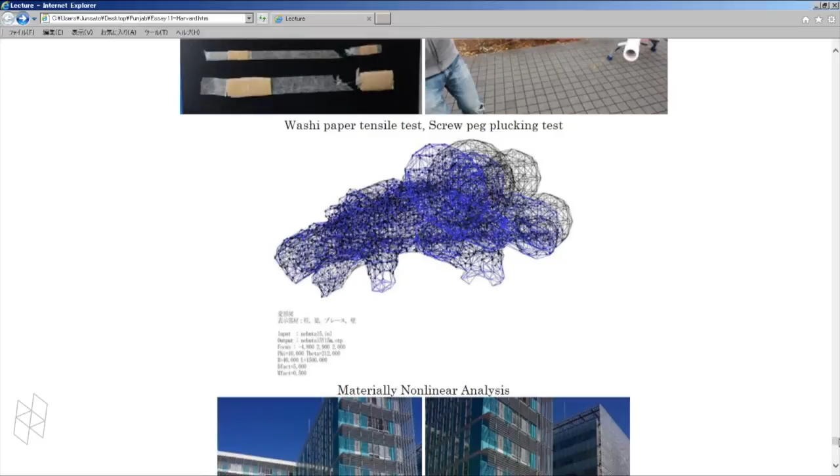Our target was like this. Almost it has 40 feet length, and we could build this structure, and it really has a translucent structure.

I was thinking, this light and ductile structure, if we could realize it for a much larger building, or a real structure, people will not die even if it collapses by disaster, or like earthquake. It is one of the dreams of the structure. So I'm imagining, or I'm dreaming. I don't think it's a fantasy. It will be achieved in some way.

When washi papers are coated with oil, it becomes like this translucent material, and it looks much like a filter-like structure against light or heat. All right, this is all. Maybe my handouts were so abstract, but I think you can find some tips for something useful for your design or your projects. Thank you.

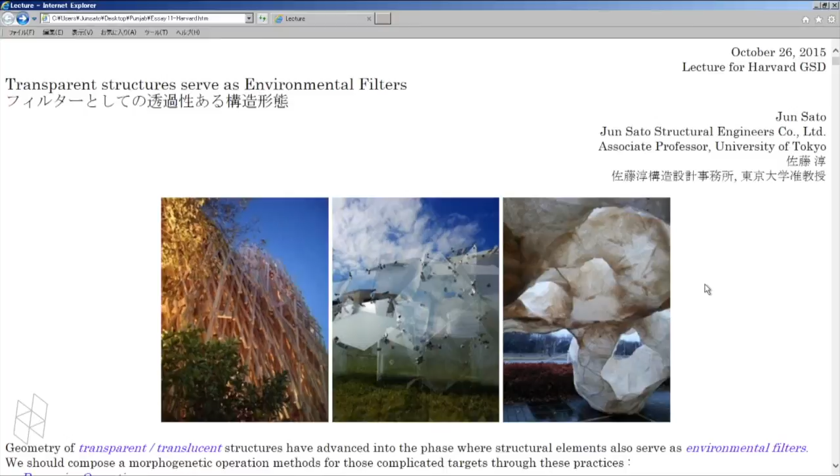That was absolutely fascinating. I'm biased, I'm a structural engineer. Sorry it took a little longer. We have a few minutes left. I've got a whole host of questions I'd like to ask, but before I do that, I thought I would open it up. Does anybody here have any questions? We can pass the microphone around.

Hi, thank you for the wonderful lecture. You're welcome. These are very interesting and at a very high level of sophistication in terms of structural engineering, that I think most students, well, I myself, will never be able to reach within school. So my question is, how good at structure do you think architecture students leaving the school need to be? How good at structure do architecture students need to be? I think architecture course students...

It's not so much necessary to understand the exact mathematics or dynamics. But I think it will be helpful if you could imagine something, even if it's not clear. If we could imagine where the compression and tension are, or the buckling phenomenon. Who knows about buckling? Is everybody familiar with the buckling phenomenon?